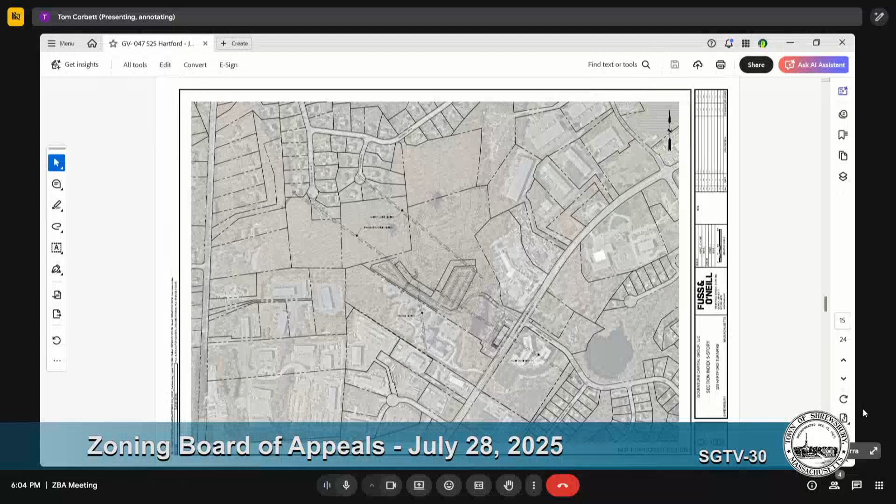So at our last hearing, we had left at the end of the meeting asking for section views of the development from various locations to better understand impacts visually. We have submitted 8 drawings in total, 4 for each perspective, covering 2 different development standards, the 5-story and the 3-story. We also heard a lot about traffic, some concerns that would be more of a planning board scope, with the traffic study through the full development phases.

We also heard from the church that visuals are of concern. So we had a meeting with the church last Thursday just to review their concerns and go over those. I had printed out some larger plans and delivered those to the church on Friday for them to really take a better look at it, blown up in front of them, so they can see it better versus tracking on the computer. So they have those plans, and we discussed a lot around screening, what we might be able to do - again more of a planning phase item, getting into the actual drawing of the project.

Right now we have conceptual renderings of both projects. Grading's not really fine-tuned whatsoever, so those items are more towards the final development of the site plan. That's kind of what I relayed to the pastor on Friday, and I committed that next time the survey crew's out there, I want to get all the mature trees located along that property line for the two upper driveways, so we can at least try to work that into the plan as best as possible, because right now we're currently showing about 10 feet from the edge of property to a wall, and then from our wall to the parking another 10 feet. So the parking itself is about 20 feet off the property line right now as it stands. But we haven't really nailed down the footprint or anything like that.

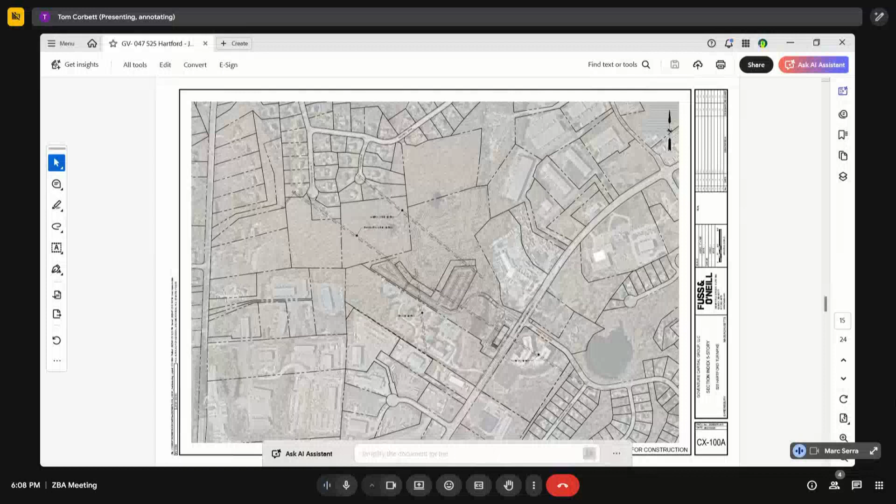Here we have the 5-story view from the church, which shows our massing compared to what's around us and the trees in the back. Proposed views: this is a 3-story.

So this one here, as you can see, is about... Pardon me, Madam Chair. Yes.

Can we mic him somehow? I can't hardly hear what he's saying. Maybe stand up here and speak or something. I can do a little bit better for you. Crank it up, all right?

Thank you. Understood. So here we see a 3-story coming in around 605, and then the 5-story comes in around 615-ish, right around 612, showing relative grades.

And then we've got Ashton Drive. This is looking from about the middle of Ashton Drive up to the project. So you're looking through that 5-story building here, looking over to the 5-story building here. Our property line is delineated here.

Trees in between. Then we've got a 3-story rendering, depicting the building that would be across the second wetland crossing, which is what we're trying to avoid here, because it's significantly higher in grade up there and does overall impact things more with the tree clearing. That little knob kind of creates a nice vegetated buffer in itself from up above.

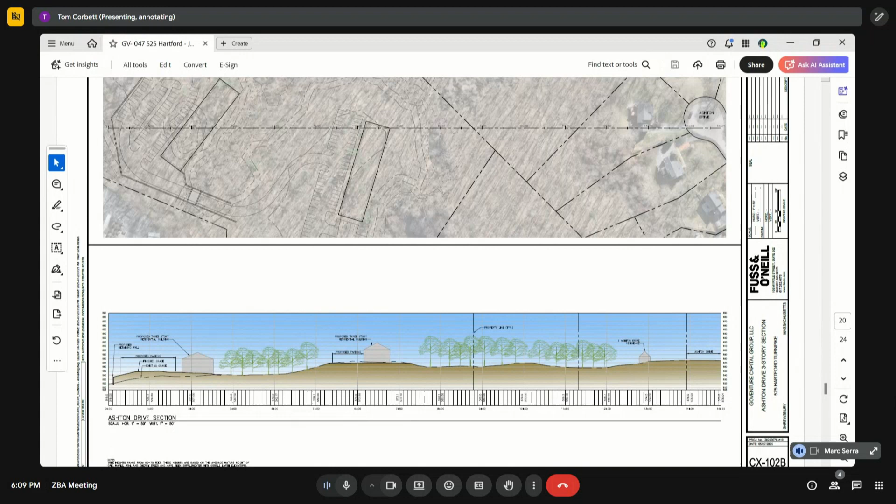And then we've got Farmington here, looking up at the development, looking down at the development, sorry. As you can see here, the topo kind of provides adequate screening, and the 3-story, same here as well.

And this one's nice too. This one's from the Hartford Turnpike, essentially. So you're looking from Stoney Hill through the points, and then you've got Route 20, then our commercial building, then the pond itself, grade change up to the 5-story building. Same here with the 3.

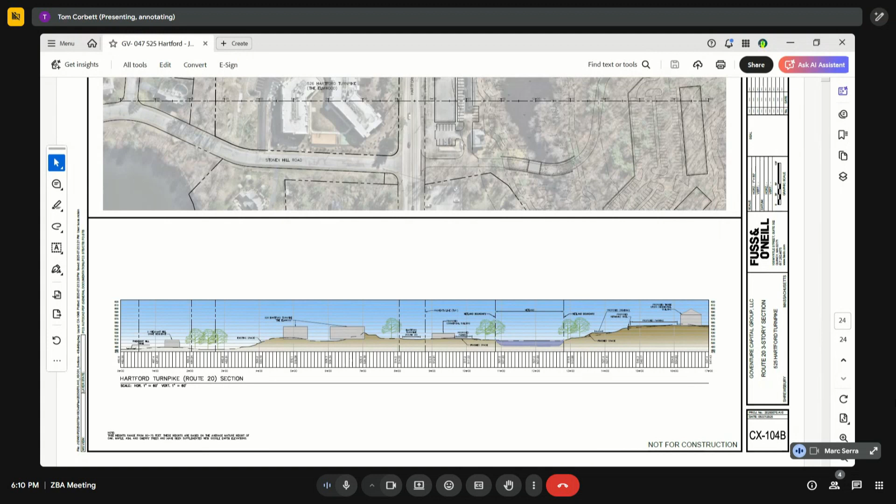And anything to add, sir? I think that covers it. So really, in summary, the 4 different views try to portray the 4 different viewpoints to the closest neighbors nearby and what those visual impacts would be from a 3-story to a 5-story. In certain instances, for instance the one through Ashton Drive, there's a couple hundred-foot section of wooded area that would need to be disturbed, that would be maintained in the 5-story option. So the 2 additional stories would significantly reduce the impact. It's nearly over 100,000 square feet of disturbance less from the 5-story down to the 3-story, for the 4-building option versus a 2-building option.

Okay, all right, thank you for all that, very helpful. Let's have the board's comments, questions, and then we'll move on to the public part of the hearing. Megan, would you like to start?

Sure, thank you for the sections. I asked for them last time, and they're very helpful to illustrate the relationship of everything. My biggest concern was the Route 20 relationship, because the grade is so much higher. I do think there may be enough distance that visually it's not going to have as much of an impact, especially given that we're not taking as much footprint up and disturbing as many wetlands. So thank you for that. I'm also encouraged to hear that you had discussions with the church and want to continue those discussions. I think that's really important in being a good neighbor. As far as questions, I think the sections really answer all my questions, so I think I'm good other than that. Thank you for those.

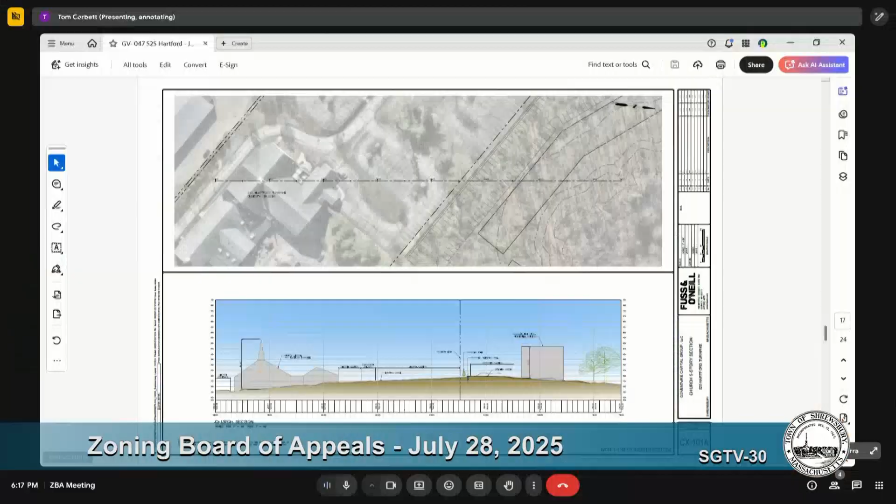Yep, so this is the sight line. Effectively, if you're standing in the back here of the building, where Mass would be, everybody would be entering Mass there, we'd be looking to the east to the building here. Again, this is very conceptual, and that's more towards the point of picking up all the mature trees that are existing there today, to better understand what we could keep.

I do understand that the entire lot next door at 495 has been cleared to the edge, and in that vicinity there is no room on the church's side for trees. So that is something, as we continue through the development, preserving what trees we can and looking at pulling that back parking-wise, where we end up total unit count, we don't know yet. So there's a lot of factors that are going to play into that, and it may be that we might be able to keep 25 feet in that section. We just don't know at this point in time.

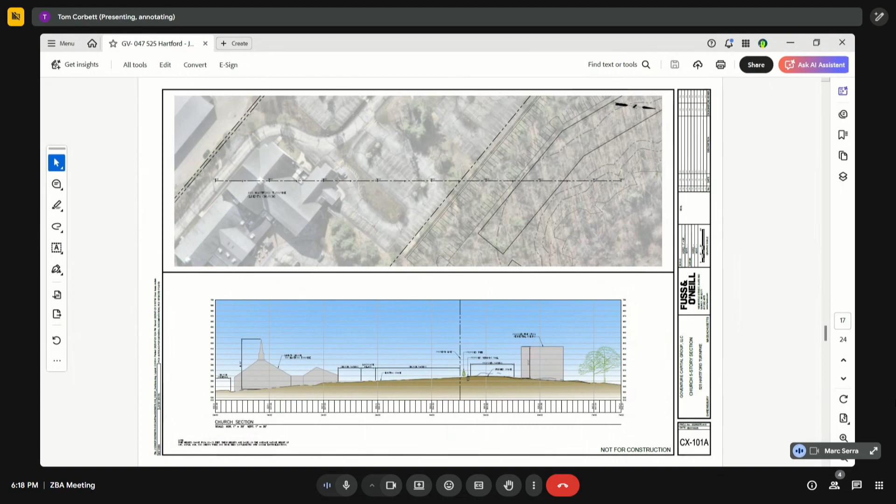Is it fair to say that you'll know as it proceeds through the planning board process? That's correct. Once we get an answer out of this board, it drives the remainder of the development and allows us to place the buildings and structure the parking accordingly. We'll get the architects involved who will narrow down the unit count, which will then impact our parking areas, which might possibly even reduce the parking now that we're showing here, pending what we can get for units.

Okay. All right, if you want to step forward, sir?

Good evening. If you could state your name for the record. O'Brien, 39 Farmington Drive, and I've met with you, Tom, at the neighbors meeting and all that. I don't have a real issue with the plan and the 5-story.

The issue I have, and I think, Chris, I mentioned that before, is that parcel, the 0 Cherry Street parcel, that's not part of the overlay district. You're not planning on using that at all in this, so we're fine with that. The only thing I mentioned to you was it'd be great if, since you said a draft decision on the zoning board about preserving the open space, the wetlands, whatever, in perpetuity, maybe adding to that - just so they can't use this, because their road at the end of that second building, the highest one there, goes right into that other lot that's just the 7 acres undeveloped.

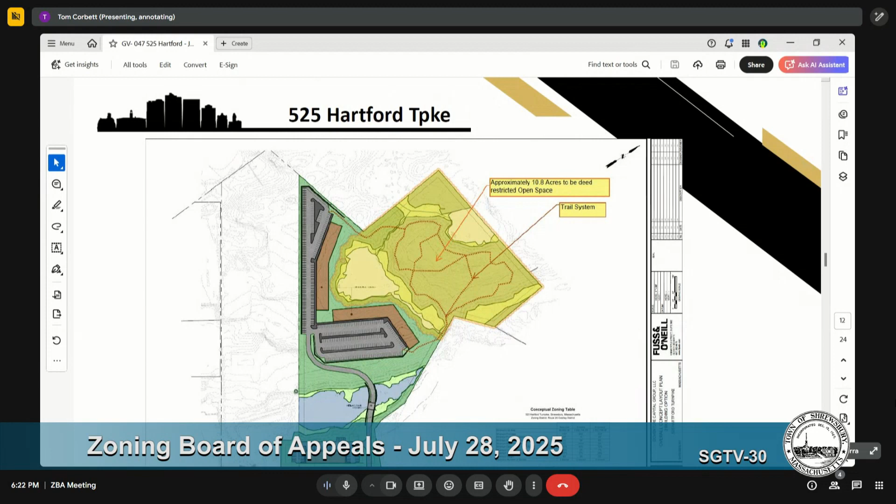This is commercial. We've had discussions in the past with the landowner, don't get me wrong, but those haven't really gone anywhere. I believe there's since been a purchase and sale on the property, so there is a gentleman looking to do something on that parcel. But this here, again, this would be of interest to me, to put parking here in the future if we needed more, if we were to ask for relief on that through planning.

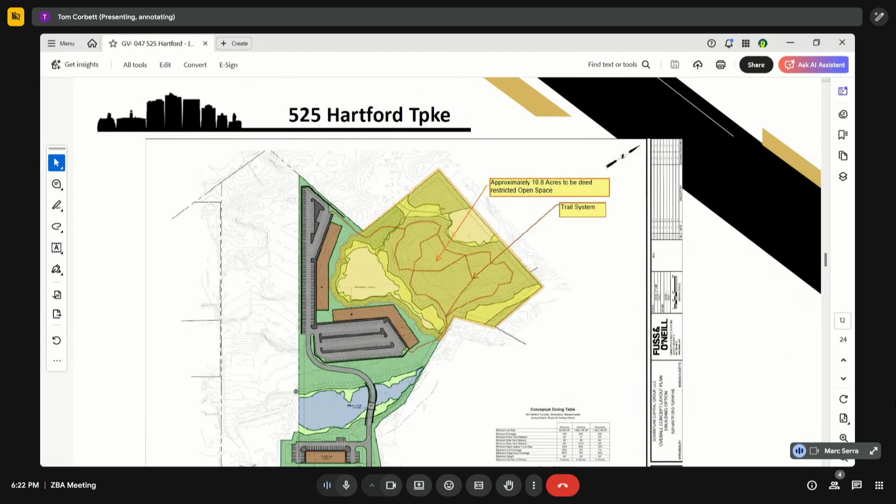Because according to the town GIS, that's zoned rural B - it's limited industrial, just the bottom part. Through the chair, do you have the survey? I think the survey may show it if you have that readily available. So that's 7 acres, so how much is zoned - about 2 acres that are in the light industrial. 2 acres, okay, this triangle piece.

But again, it's not something that I have desire in right now. But I just want to keep an open dialogue and say that if anything were to happen, it would be in that tiny little portion, pretty much connecting orange and yellow up top there.

Has that been a recent update? Because the last time I checked, the whole 7 acres was rural B. Yes, if you go onto the zoning map, you'll see that the light industrial cuts right through it. Oh, really? So it is 2 acres of land that can't go into residential purposes.

It is light industrial, but the topo up there, at this top corner of the parking lot, is probably the toughest topo-wise. Going that way, it would really be like leaving space on the plan, we wouldn't be engineering it to the point of actually building it. Well, it would be a full engineer job, but it wouldn't be to the point of building it.

I understand, it's land that's there that at some point is gonna be developed. I'm just looking for hopefully some safeguards, that all of a sudden it doesn't become, okay, we're gonna add a 40B with 200 more apartments, and with the way the topography is, it kind of goes up from my backyard, it would be like hulking over my backyard there. So I'm looking to hopefully mitigate some of that potential impact to myself, because I'm not looking to move or all of a sudden have an apartment in my backyard.

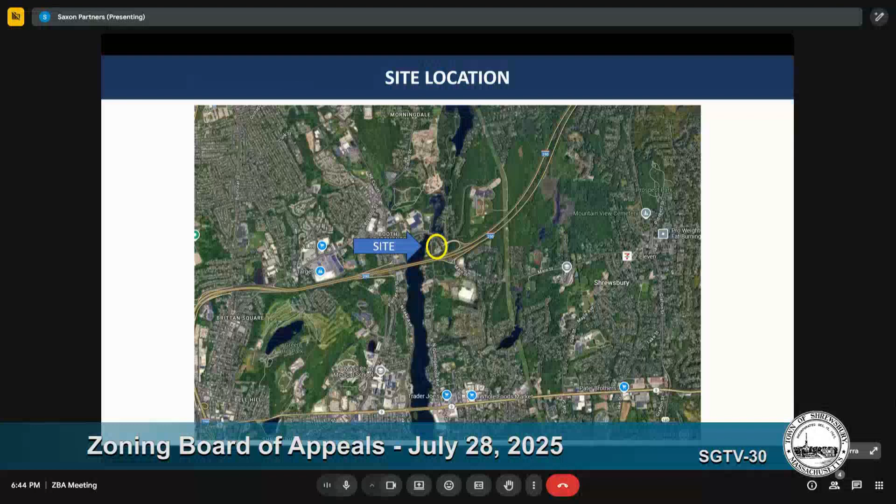The stakeholders obviously remain the same, so I'll just jump beyond those. And the site locus map, as you can see on the screen and the PowerPoint printout materials in front of you, obviously again as a reminder, 104 Main Street, bounded by Main Street and Quinsigamond.

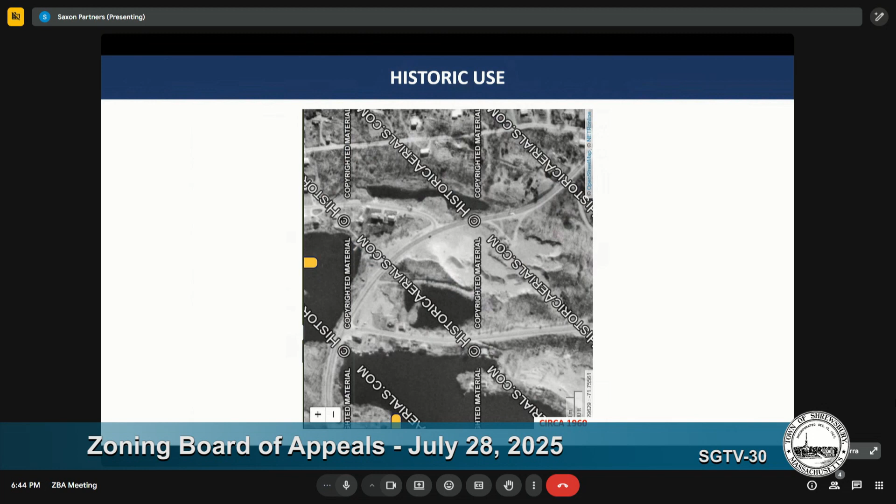What I would like to share with the board, just to get everybody reacclimated - this is a point that may come up later on - I went through and gathered some historical aerial photographs of the site to remind the board what the property looked like in its early stages of development. This plan, or image, is orientated with Quinsigamond along the bottom of the page and Main Street running lower left corner to upper right corner, just to orientate you to the plan. This plan goes back to 1960, so it's before the highway got installed.

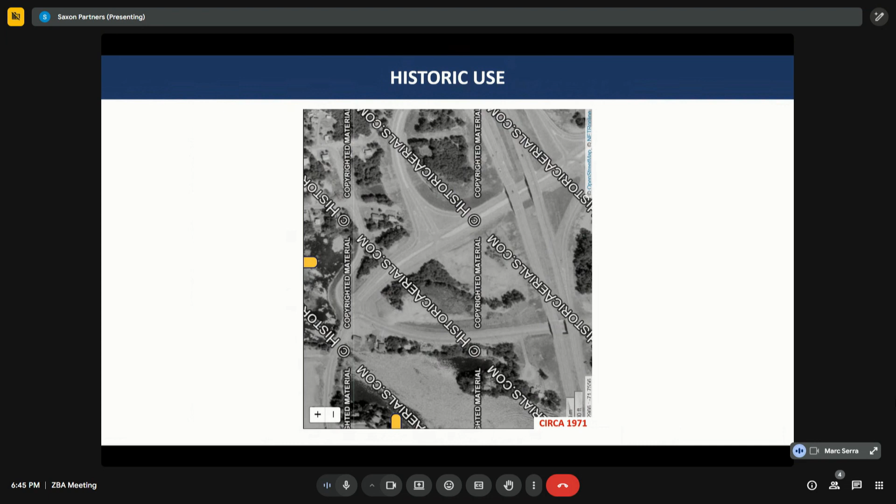The site was by and large manipulated, and you can actually see the darkened area on the plan is actually a collection of water. That came up during our meeting with the neighbors - somebody had asked about whether there was a water body there before, and there was a collection area back in the 60s. But as I advance through and jump into 1971, when 290 got constructed, you can now see on the right side of the screen going page up to page down, they infilled that area. The entirety of the site was by and large infilled with materials that were pertinent to the construction of 290, so we were sort of ancillary to the cause.

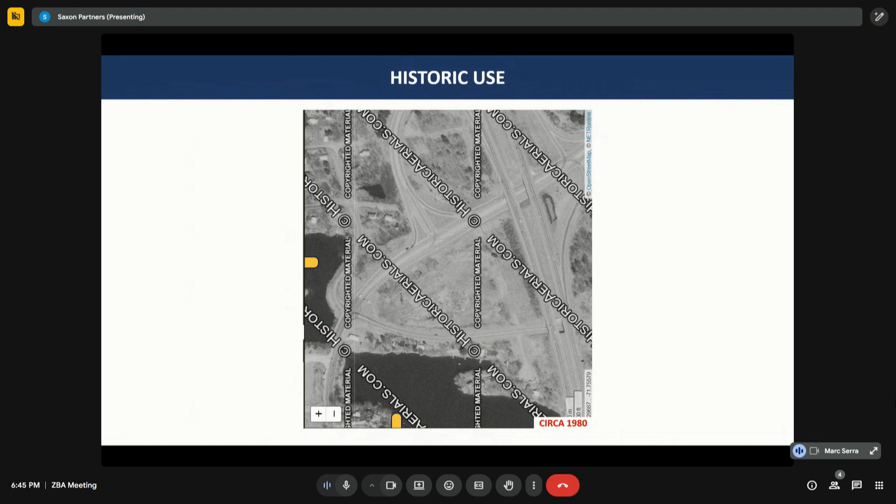In 1980, you can see the site starting to stabilize itself. It's empty, vegetation is starting to grow in, but is pretty much the same. In 2001 is when you started getting some clearing of materials on site. Some of the early gravel paths were installed, and you can see some vehicles and some staging.

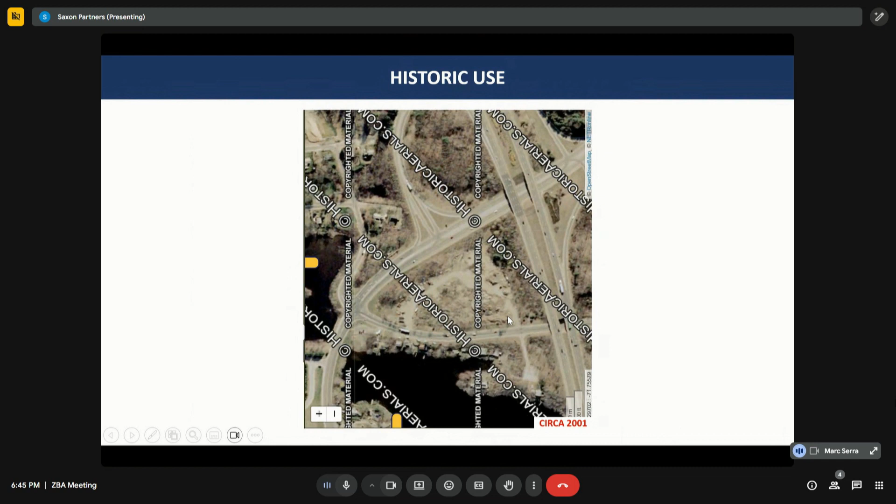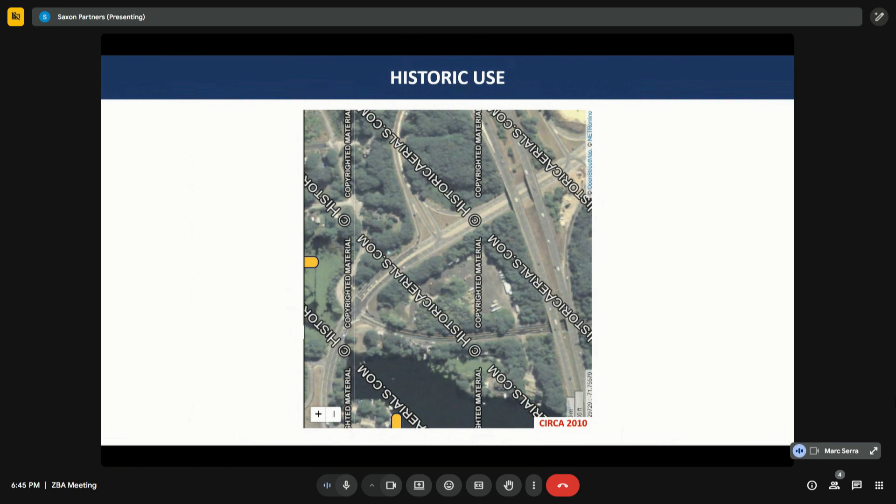Along the Quinsigamond side and deeper into the site. Then in 2010, the imagery gets a little clearer. The expansion of use gets a little bit larger, and the amount of land being utilized bigger still. That jumps us into the image we shared with the board at the last meeting, which is from around 2024.

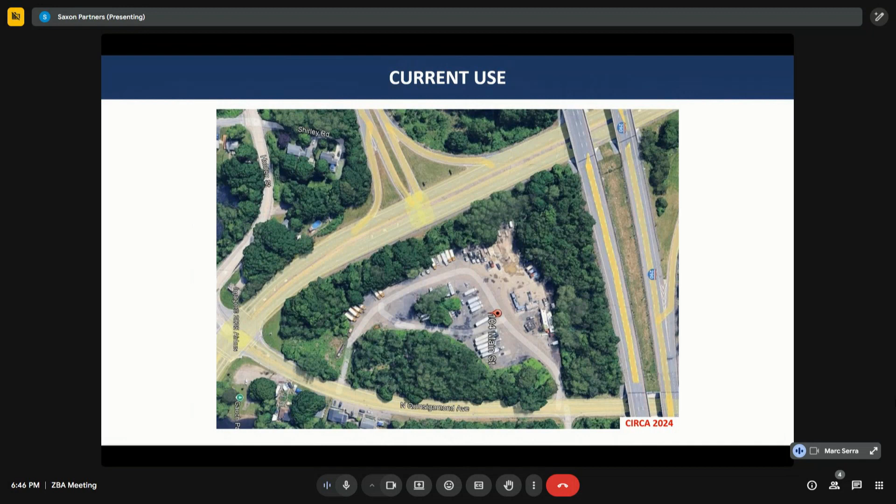That takes us into the site plan as we've prepared the existing conditions portion of it. We did resurvey the property, so everything we're presenting through the board, through the application, is based on the current conditions. The survey is an attempt to depict the current conditions of the land, and we've also identified the amount of parking that exists on site.

We estimate there's about 83 trailer spaces. These are, of course, unmarked - this is not a striped parking lot, but based on historical records we're trying to determine how many parking spaces are available on the property and what it was being used for, and we've identified about 83. Similarly, there's a smaller amount of pedestrian cars shown in green, about 11, sort of supporting vehicles to the truck delivery taking place. The remainder, everything within the tree line, is a cleared and compacted gravel area. The site is most definitely not in a natural state - it's been manipulated several times over its lifespan, up to and including now with its current activities.

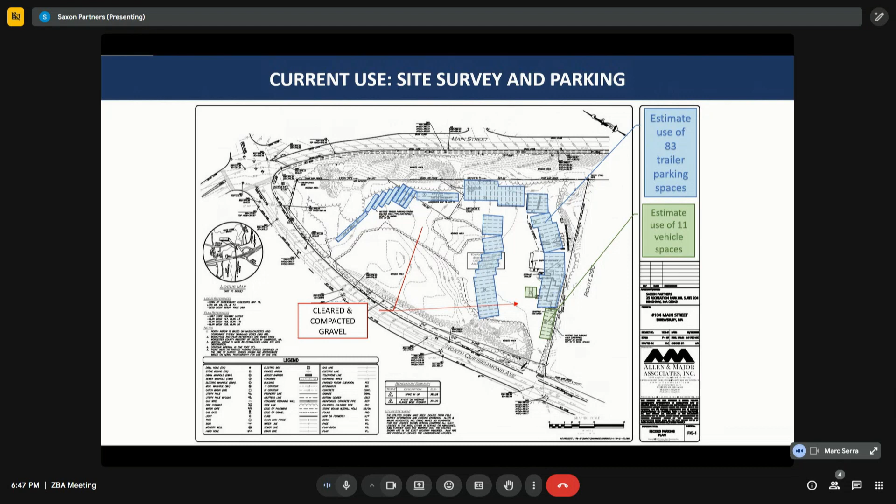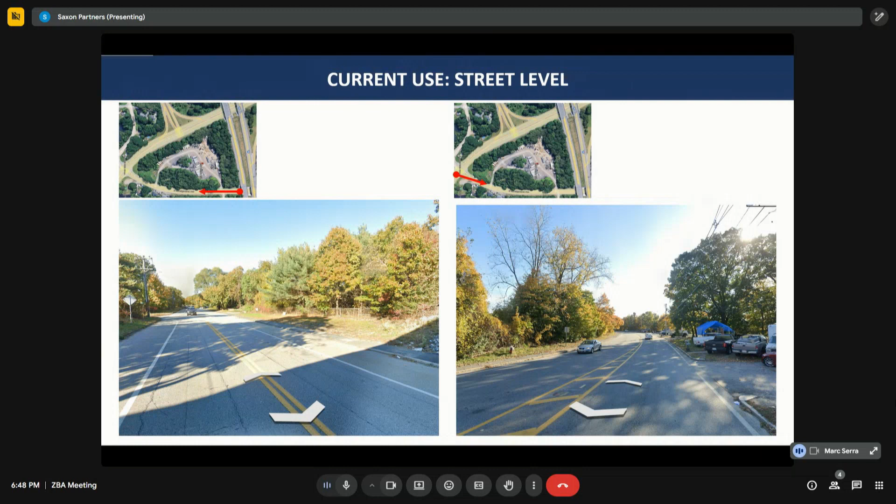I wanted to bring some street level imagery to the board's attention, just to focus you on where the site is. The image on the lower left is on Quinsigamond looking north. The site is to the right, generally along this side indicated by the arrow. On the right image, that's from the intersection at Main Street in Quinsigamond looking back to the site - now the site has moved to the left, just to give a general sense of where that site is located relative to the adjacent roadways.

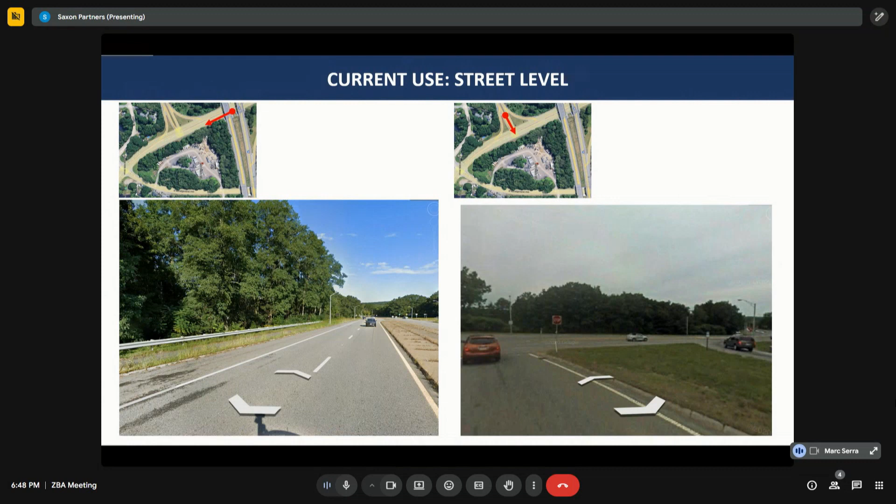Flipping to the other side, the lower left imagery is along Main Street, and the site is on the left side of the image. The right side image, a little bit dated but by and large still the same, is from the 290 off-ramp, literally directly across from the site is what you're seeing. One more image, right at the intersection, splitting the baby down the middle - on the left would be Main, on the right would be Quinsigamond, with the site being the treed area in between, hidden behind those signals.

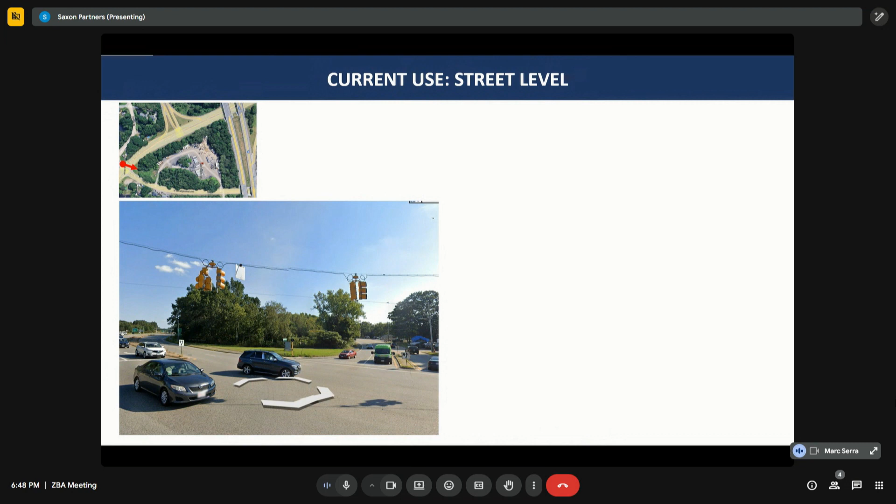Excuse me, one second. Yes. Would you just explain how this will, it may not marry up with the paper in front of them?

Yes, I apologize. So the slides that I'm going to walk through, images are going to appear as I'm focusing on different methods of talking. The slides printed in front of you basically have the massive information on them, so they may not translate cleanly, but I'll do my best to walk through the details.

As we're talking through the site design, key elements we needed to focus on were the access to the property, which in this case is directly off of North Quinsigamond. We have 2 site driveways, both 24 feet wide. They accommodate ingress and egress, and are largely driven by the needs of fire apparatus to be able to get in and around the site as part of our public safety study.

The distance to the northerly entrance is also born from the distance to the intersection. We need to ensure, under the traffic study that will be a future discussion, that our entrance does not conflict with the expected stacking of vehicles at that intersection, at that signal.

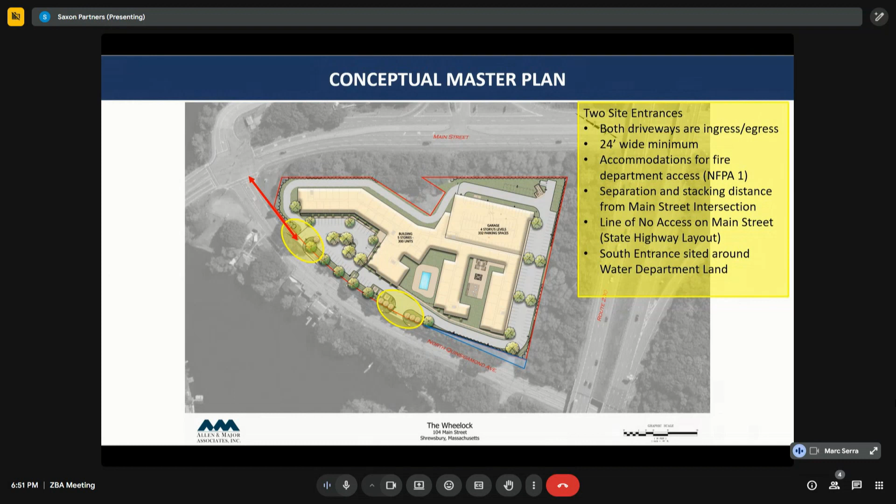We do not have rights to pass over that land, even though the current use does pass over it. So that's what dictated where our driveway locations are. As a reminder to the board, we do not have rights of access to Main Street on Plan North. That's a state highway layout, designated as no access because of the configuration of the exit ramp to 290, so they do not want additional curb cuts anywhere along the Main Street side of our site. On Plan East, we directly abut the elevated portion of Route 290 with steep slopes coming into the site. So our only access to the property, to the public right-of-way, is through Quinsigamond, despite the property having a Main Street address.

When we get into the detail of the site, we want to identify for you how the parking and circulation will function for the project. What we've submitted on the application is a two-tier parking situation: a combination of on-site surface parking spaces, 121 to be specific, and 332 garaged parking spaces amongst those 5 levels that I referred to.

Those spaces will abut minimum drive aisles. For the surface parking, it's 24 feet, which is what the town of Shrewsbury requires, and we have that throughout the entirety of the site, accommodatable for the fire access vehicles, which we'll talk about a little bit later on.

We do have ADA spaces accounted for on the surface and also located in the garage. New information as of today, one of the comments through staffing, the staff letter, and also through Graves Engineering, is identification of where those ADA spaces are so we can reinforce that we are conforming with the regulations. We'll provide that. We will also have electric charging stations throughout the site, in accordance with the stretch code requirements. We do not have them designated on the plans, but we are affirming that we understand those are a requirement and they will definitely be added.

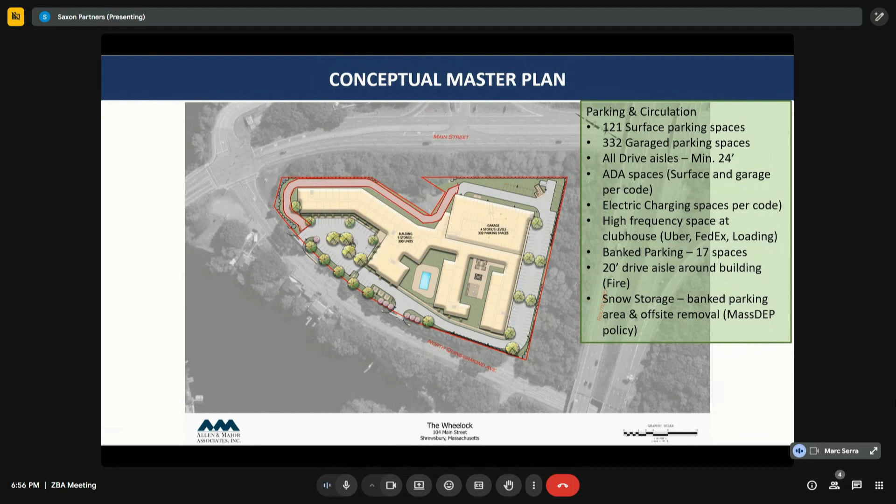We will add annotations to the plans to designate where initial snow storage will be kept on the property. We would also ask that a condition of any permit issued be the responsibility of the owner: should the site reach capacity in terms of snow storage, the snow needs to be removed. Mass DEP has a policy that snow can only be deposited in areas accepting of additional snow, so we can't put it in the lake across the street. It has to go to an acknowledged location, and these owners, as operators of the property, have acknowledged and accepted that.

The next level we want to speak about, once we get through the vehicle discussion, is our pedestrian connectivity. We are adding 300 residential units to the community of Shrewsbury, and we want to make sure residents of the Wheelock can be accommodated in a number of ways and have choices in terms of their ability to maneuver around the site.

The first statement we'll make regarding the site plan in front of you is that the site is fully ADA compliant. None of our grades exceed the tolerances under the Accessibility Code or the Massachusetts Architectural Access Board, so any point on the site is accessible to any other point. We will introduce full sidewalks along the front of the building, designated on the screen in red. That is a means for residents parking on the surface, or visitors coming to the site, to directly access all points of the building. Anybody parking within the garage would also have direct access to the building itself.

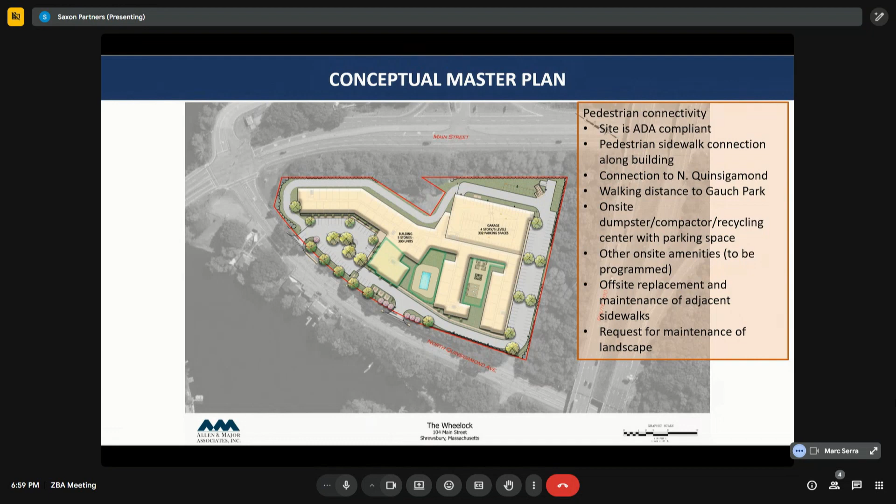Quick question - is that the blue arrow? The blue arrow is the connective direction to get to the dumpster, which is the shaded area right here on the screen. We've also provided a parking space next to it, since we anticipate there will be occasions where residents deposit their trash as they're leaving the site, so they may park next to it. One comment we received from your peer reviewer is that we may need to accommodate more than one car, since we don't want those cars queuing within the drive aisles. We'll look into that, and you'll hear more about it at the next iteration of the meetings.

We obviously have some large areas between the legs of the building and the building itself that do have to be programmed. I'll defer this to the architectural design, but I want to identify to the board that the building will be provided with a clubhouse, which will likely have a fitness center, community space, workspace, etc. Outside will be courtyard space, sitting areas, pools, fire pits, gas grills, and other common space amenities you'd anticipate a 300-unit development to have.

Those are generally depicted in the green areas. As I mentioned, we have sidewalks along Quinsigamond, so the owner is actively in discussion with the town for the ability to replace the sidewalks along Quinsigamond. Several areas are in disrepair, so we are anticipating replacing those sidewalks as part of the overall mitigation for this project, which will enhance things for the residents of Shrewsbury as well as the new residents of the Wheelock.

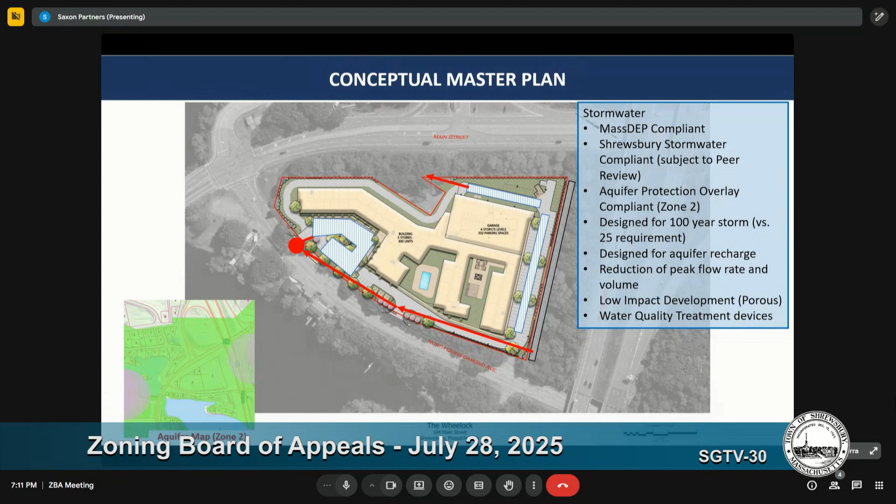Next is utilities. We have been working with the engineering department and the water and sewer department. We had a meeting with them between our last meeting and this one to coordinate how the utilities will work on this site.

There is a sewer trunk line, an 8-inch PVC, that runs in Quinsigamond. We presented to the town engineer that we will solicit for 4 individual connections into that sewer line. Each portion of the building will have a direct discharge into the sewer main, and the reason for that is it allows us to keep those sewer pipes high rather than artificially deepening the system. The town engineer did not see a problem with that in terms of access to the sewer main.

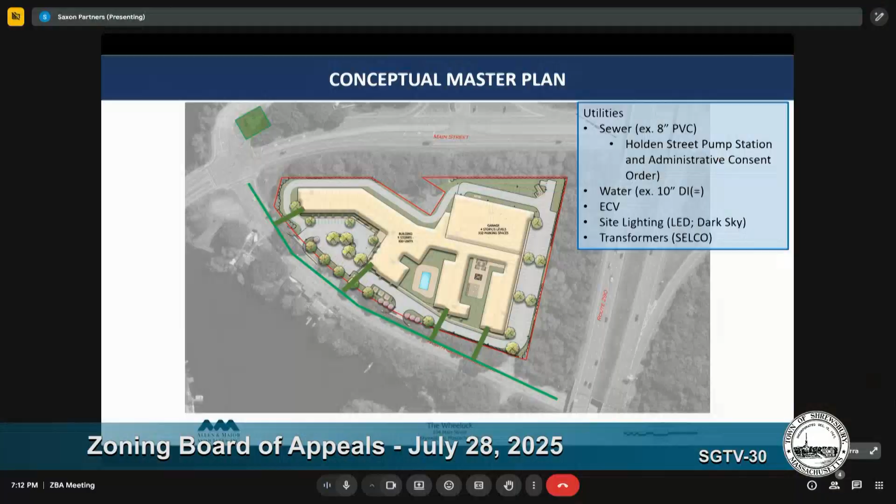We are aware, through the town engineer's comment letter and our meeting, that the Holden Street pump station, which is across the intersection, is under an administrative consent order. They're currently assessing some upgrades that need to be done to the Holden Street pump station. We are aware of that.

We are also aware that the town has submitted a report to Mass DEP that is currently under review, which proposes certain changes. Once we start getting feedback, we will re-engage with the engineering department on the ultimate connectivity and discharge of sewage into the system that will ultimately flow through the Holden Street pump station.

They have indicated that even though the sewage from this area of Quinsigamond goes through a series of pump stations, Holden Street is the only one with a capacity issue at the moment, which they are actively working to resolve. The timing of that resolution may work just fine relative to the occupancy of this building post-construction.

Similarly, there's a water main in the street in Quinsigamond. It's a 10-inch ductile iron pipe. We will seek dual connection into that, coordinating with the water department: 1 fire service line and 1 domestic service line. Very perfunctory, but we will work with the town on solving those challenges.

Yes, sorry, please, can you just say what EV is?

Oh, electric vehicle charging stations. The stretch code that the town of Shrewsbury has adopted requires a certain percentage of our spaces to be accommodatable for electric car charging stations, a portion of which will be available at first occupancy, and a portion of which will be expandable for future use should the needs grow. Sorry for the acronyms, I assume too much.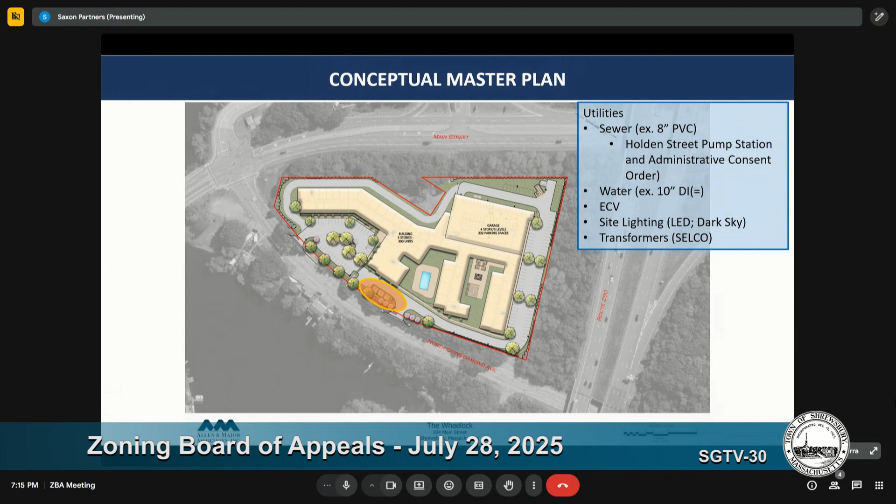We do have the benefit of some staff comment. The town planner provided us some initial staff comment through the portal, and I want to touch upon a couple of them quickly. These will follow up in writing as formal responses to comments to document this information. Some of these comments also came from the town engineer.

The first one is we have some retaining walls noted on the property. We have no access to the right-of-way adjacent to Route 290, which is the slope higher than the site. We also have that small piece of water department land we have no access to. So our grading has been limited, forcing us to include a couple of retaining walls on the property. The question that came up was constructability.

Those blocks tend to be about 48 inches deep, but they do not require any work on the state land, which we may not have access to. We could construct the retaining wall. Similarly, but to a smaller scale, on the land abutting the Shrewsbury Water Department, we have about 3.5 feet where we need about 4 feet of wall height. We can do a smaller segmental block retaining wall.

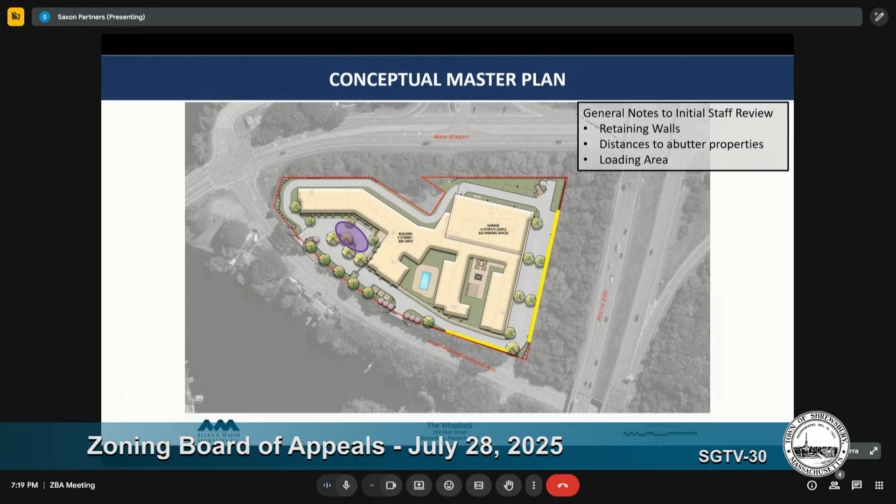There was also a comment regarding a loading area for move-in purposes, and I'll reference the board back to that flex space we're creating along the front of the site, which can be used for a multitude of purposes, including a coordinated delivery of furniture, move-in information, etc. The owner can coordinate that space is reserved, and the materials, whatever they happen to be, can be brought into the building without interfering with any parking or circulation around the property or to the access points, the garage, the site entrances, and so forth. That concludes.

I'll take a deep breath and field any questions the board may have on that level of detail. I do have all of the engineering drawings in my slide deck, we can certainly talk about them. I'm sure the board will probably want to entertain some commentary from your consultant Graves here this evening, hear it from their words rather than my long-winded dialogue, and start answering some of these questions in terms of how this site came to pass and can function.

That was very good. Okay. Did that without a breath. One long inhale, now a deep pause. That was very good. All right.

Where do we begin? Do we need any information up front before we start the dialogue? So our office developed a comment letter, which is alluded to, based on the information provided to date. I think those kind of speak for themselves, so I don't need to reiterate them in this process. Given some of the information provided this evening, we anticipate we'll probably have some additional comments related to some of the representations made this evening, and some of the site work.

In addition, we do have the peer review comment letter that was provided. Jeff Walsh is here to speak to that. We've skimmed it, but we're still going through it ourselves, as it was received recently. So I think that's the bulk of what we have for this evening, and I'm happy to go through things as the discussion evolves.

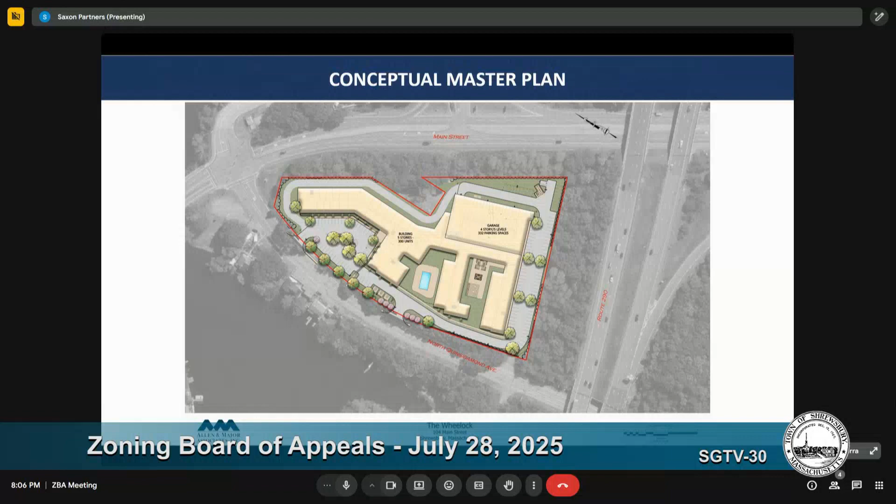Could you pull up the slide that shows the abutters' distance? I have reviewed the letters on the website from the fire department, the school, the police, sewer and water, and it seems like there's a lot that would need to be done to make this work properly.

And I'm assuming that would be done. Okay, so which one, I'm at 323. Can I take a picture of that slide? Absolutely. I couldn't see what the numbers are there. Through the chair, I apologize, I don't know which property 323 is.

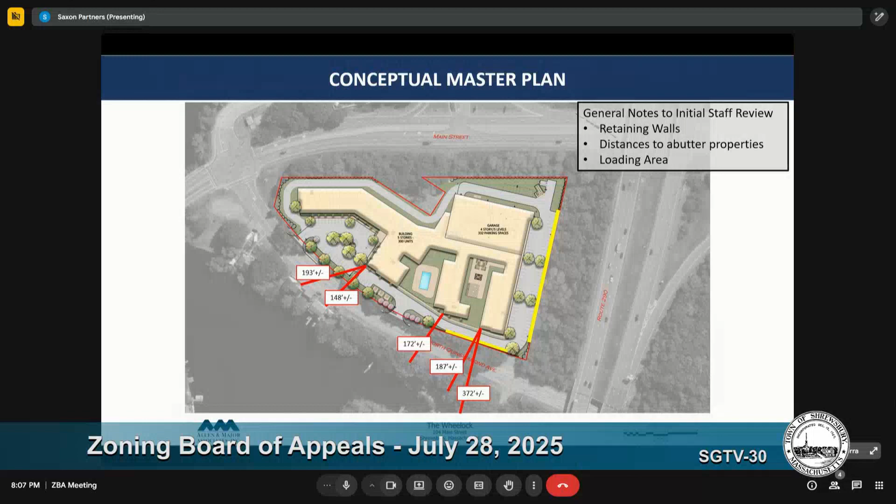How come the two houses on the end are not noted? There's a house here and there's another house right next to me, right in these trees. Through the chair, that question sort of arose - yes, we will document all of the properties and add all of the dimensions. We wanted this slide to be an indication that we are aware of the comment and will provide the dimensions requested. If we're missing the abutters' homes, or the ones that are not there, we'll make sure they're on there.

Is the entrance across from Lear Street, the main entrance? No, through the chair, the entrances are directly on Quinsigamond, so they're not opposite that intersection, they're opposite the other properties. At the information session, you had said you were going to be more down towards 290, further down toward the 290 bridge, which, right now, the entrance is across from Lear Street.

And is the flow of traffic going to be, they go in one entrance and out the other? So that's going to get covered, our next meeting is going to revolve totally around traffic. I highly recommend that you come to that meeting because there's going to be a lot of discussion around that. And I would ask that perhaps we have a better visual for next meeting on where the abutters are in relation to the site plan.